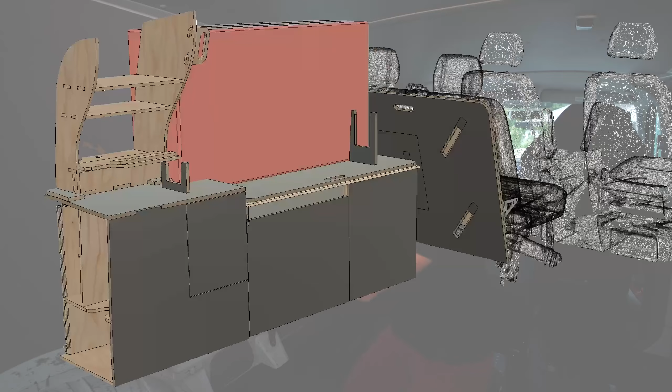Over here is basically the most simple storage you can imagine. It goes up to this level, above which will be the bed, on the level of the flipped-over backrest of the two-seated bench. Just basic storage. Right next to it will be the fridge, in front of the wheel housing, and there will be another space above the wheel housing behind the fridge that you can reach when you just pull out the drawer of the fridge.

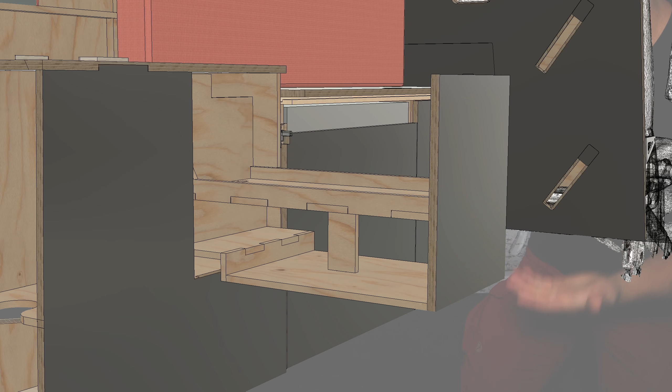Next to it there will be a drawer you can draw out into the hallway. This will be reachable from both sides, as it will host all the food I need for cooking outside and for snacking inside. By having a drawer available from the sides, I can get to it from outside and inside fairly easily. Beneath there will be big storage for my hiking backpack and some storage for my climbing equipment.

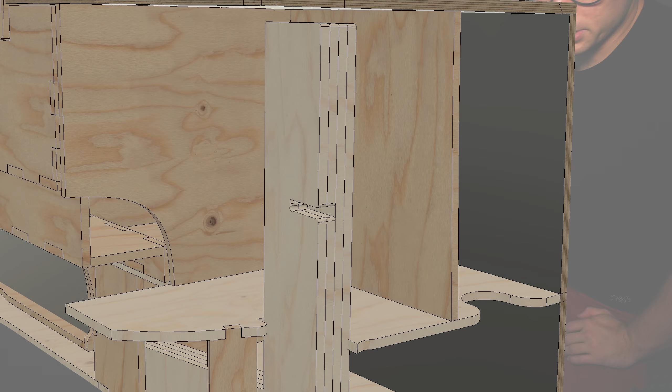Next to it will be the second water storage, used for cooking, maybe for cleaning, or if necessary for washing myself. Above the storage for the hiking backpack, water, and climbing equipment there will be another shelf for clothes or other stuff that's not dedicated to anything specific.

There will be a piano over here, and right next to it a little space for electric stuff, for cable management and so on. This will be kind of my charging port.

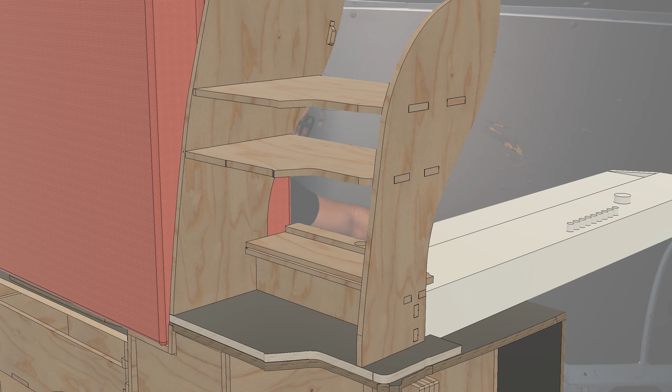Next to this shelf there's a board that goes up, not only to hold the shelves right next to it but also to hold the mattress beside it. This board is a little curved, so the mattress will be bent inwards, and so it doesn't flip over there's a little board in there that holds the mattress from falling over.

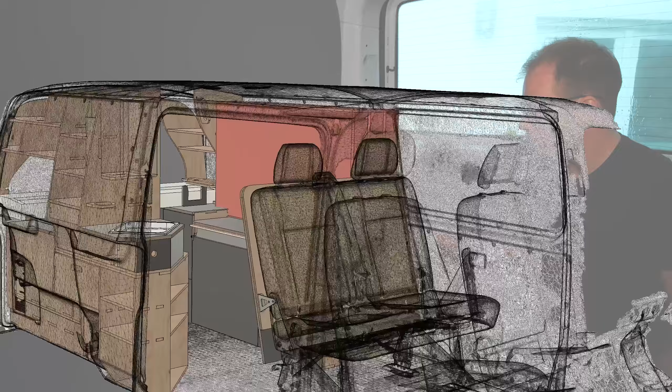Then over here is the piano. Down here will be the kitchen, and I managed to find a solution where I can use the kitchen from the inside while it's drawn out, but also, which is what I'll usually do, from the outside underneath the hatchback. To use it from the inside I have to move the piano over.

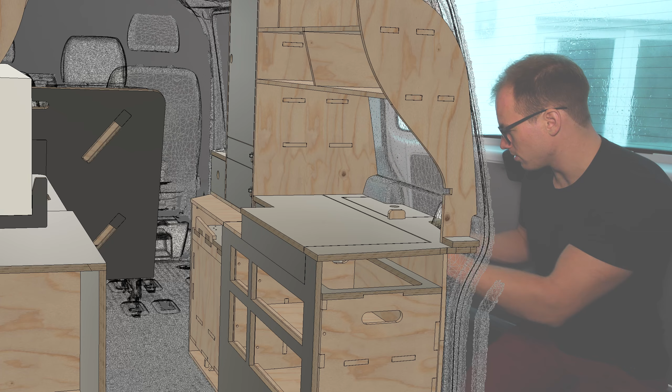Therefore I have a storage space on top of the bed, even when it's not flipped out. And over here I have these cutouts in the front to get to the shelves inside the kitchen, but I can also flip up the top of this cupboard to reach the stove and use it as well. I'm pretty curious to see if the wood gets too hot.

I'm a little afraid of this, but I'll have my windshield that I'll put in front of it to reflect some of the heat, hopefully. I will test this carefully.

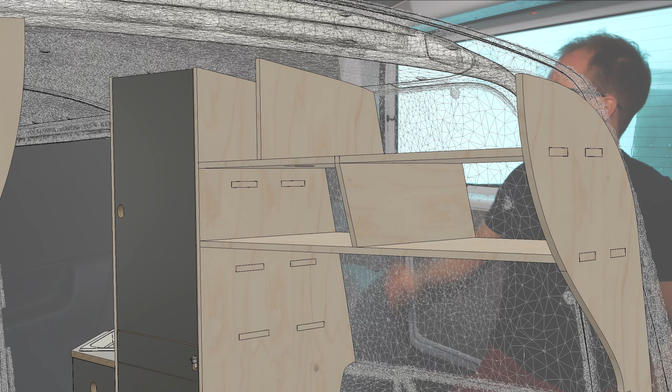Above there are two shelves again, and the top shelf will host my guitar as well, which just fits here in front of the hatchback. There's a step anyways, and the neck of the guitar will be in front of this. As this is above the piano anyway, most of the time it won't be in the way, which is pretty important.

Beneath the kitchen there's a long space that will host the camping stools and maybe the hiking sticks, longer stuff that fits in there. Next to it there's a big cupboard that goes all the way to the ceiling with just a normal door, behind which I'll have space for clothes and other small stuff that's not dedicated to anything specific.

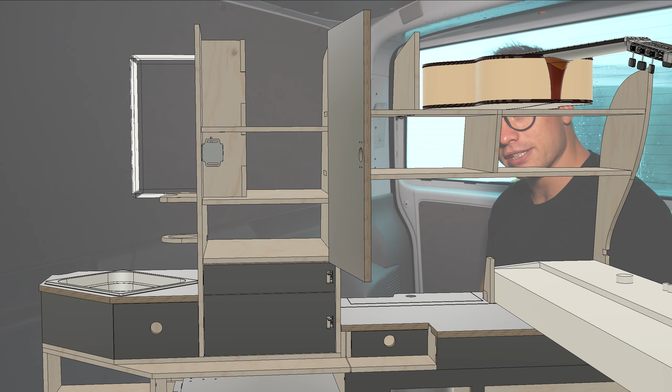Underneath there are 2 drawers again, and then underneath there is actually a space that hosts a little stool. The stool I will use for playing the piano, but also like sitting at the desk.

Above the piano I can install a tabletop. The tabletop is also a part of the bed, I'll show you in a sec, and can be the tabletop for the camping table outside as well. Therefore the legs are in the cupboard where the hiking backpack will be, that you've already seen. And back to the little stool.

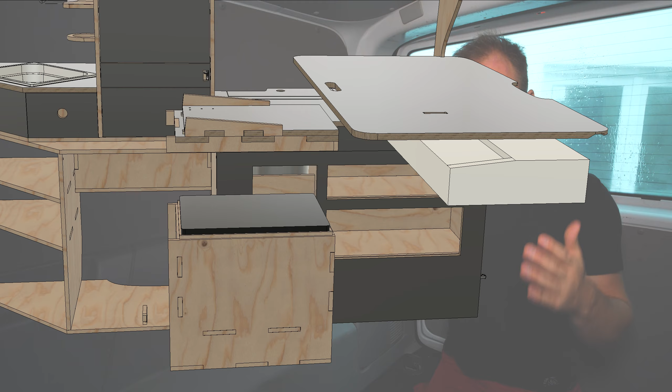This hosts also the toilet, a Boxio. Next to the Boxio storage, or the garage for my stool with the Boxio included, there will be a storage where the corner is cut off, so I can walk nicely through here between the seats and this shelf. This will host all my shoes. I think that's pretty neat, right next to the sliding door, to have a space for them. That's something I always missed in all the other conversions I've lived in so far.

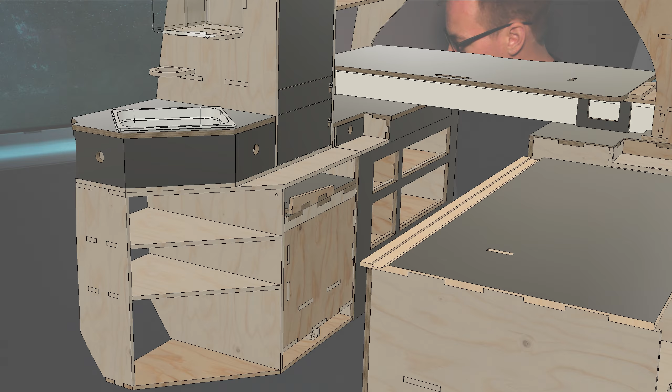Above there will be a sink with my first water supply here in the front, that will host the water I can use inside to fill up my drink bottle or wash some fruits or something, or just my hands.

This sink is also angled 45 degrees according to the cut-off corner. That's why there are 2 little spaces right next to it underneath the sink, with little triangular shaped drawers as well. And of course you can take out the sink, as there is no grey water tank underneath. Actually, I've never missed that in the other conversions. It takes quite a lot of space and makes it much more complicated to use.

I don't use much water inside anyways. The little water that I use inside can just stay in there till I'm able to empty it outside. And as I don't use any soaps or stuff that's bad for the environment, I can just empty it basically anywhere without having to fear polluting the environment.

And then there is a little cup holder for my toothbrush to hold. That's pretty nice, I think. That's just a little gimmick.

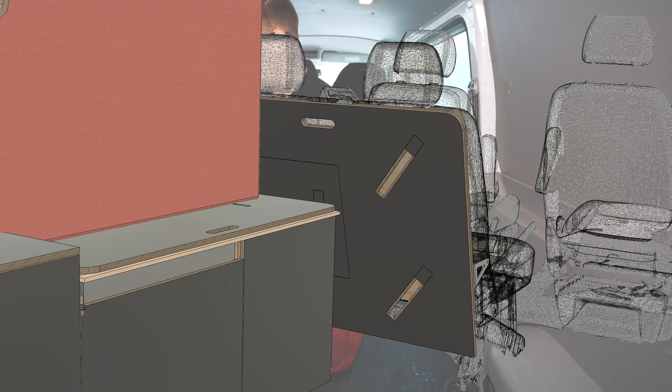The most important thing, how does the bed actually work? Well, the bed is combined out of 3 parts basically. The first part is above the cupboard over here, and I can slide the top of the cupboard above the hallway over here, and this sits on the cupboard on this side as well as still on the cupboard on that side. This board is pretty important, as it's also the desktop I can set up in front of the hatchback.

That's together still not big enough to make a whole bed, and that's why there is a board attached to the backrest of this bench. This board is actually a little too narrow. As you can see, the bed is wider over here and goes on top of the cupboard on this side, as I just told you. But I wouldn't like this board to stick out here permanently, so it would make it pretty hard to walk through there, because it's getting really narrow between this board and the cupboard.

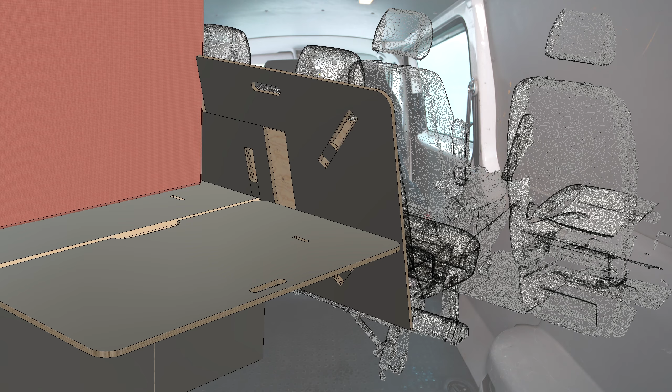So this slides out to the side, but it also needs to slide out to the top, as I didn't want it to stick out here permanently, because I really enjoy having the view out of the back window while driving, and didn't want to block this permanently. So this board needs to be pulled up before the backrest gets flipped over. By pulling up this board, this also slides out to the side and up, and then the sleeping space goes all the way to the front to the driver's seat. This makes a sleeping area of 2 meters by 120, which is pretty comfortable for camping in such a small van.

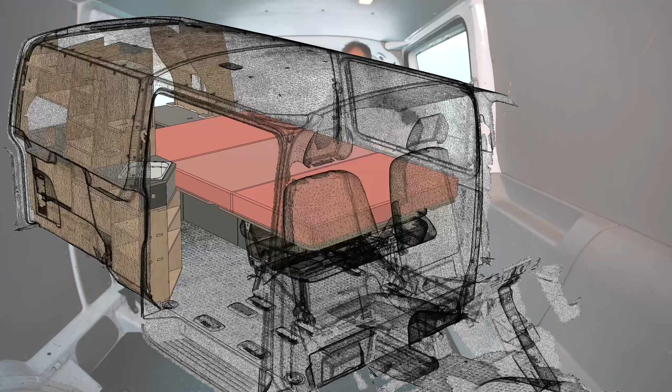Well, I haven't tried it yet in the real world if this mechanism works. Fingers crossed, I hope it does. We will see. But I think that's all about the design so far.

I hope I haven't missed something, otherwise you will at least see it in the finished build. As I already told you, I would be really curious to hear your feedback about this design before I'm finishing this, as long as I can still improve things. As I plan to live in this van for quite some time, I'm really trying to make this as good as possible for my needs.